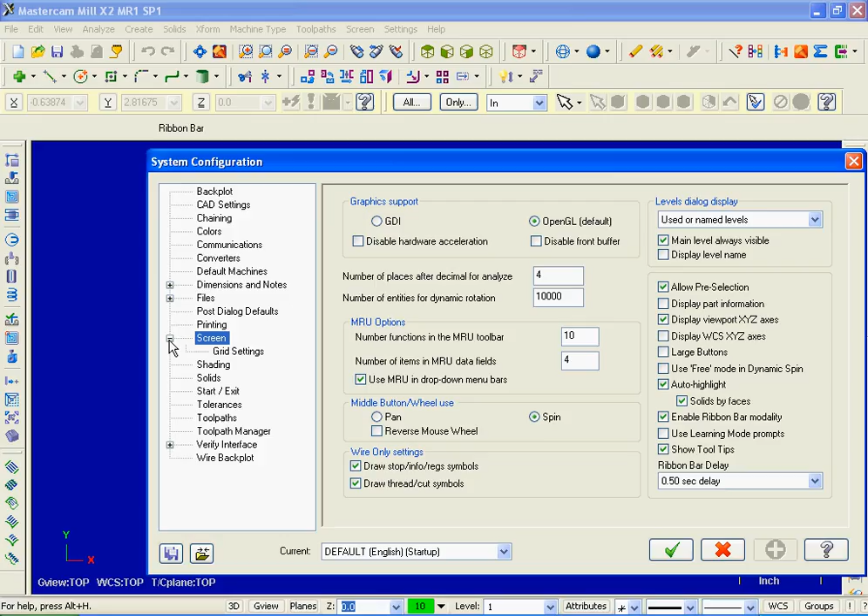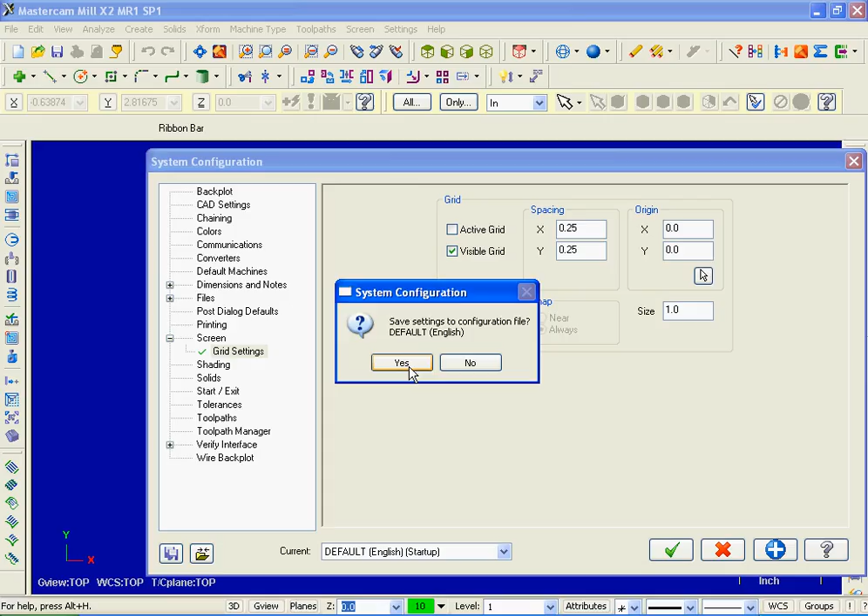Next we're going to set up the grid. So once again we're going to go back into Settings and I'm going to pick the first on the list, Configuration. On the left side of the screen I'm going to click the plus sign next to Screen and then click on Grid Settings. Moving over to the right, the first thing I'm going to do is put a check mark against Visible Grid and then slide down to the right. I'm going to input the size as 1.0. We're done here, so I'm going to pick OK, and then I'm prompted Save Settings. I'm going to click on Yes.

Now this particular lesson just deals with geometry. If I click Alt-O on the keyboard, now you can see the Toolpath Manager. I'm going to click Alt-O again. We don't necessarily need that open. Let's continue now and let's start to create the geometry.

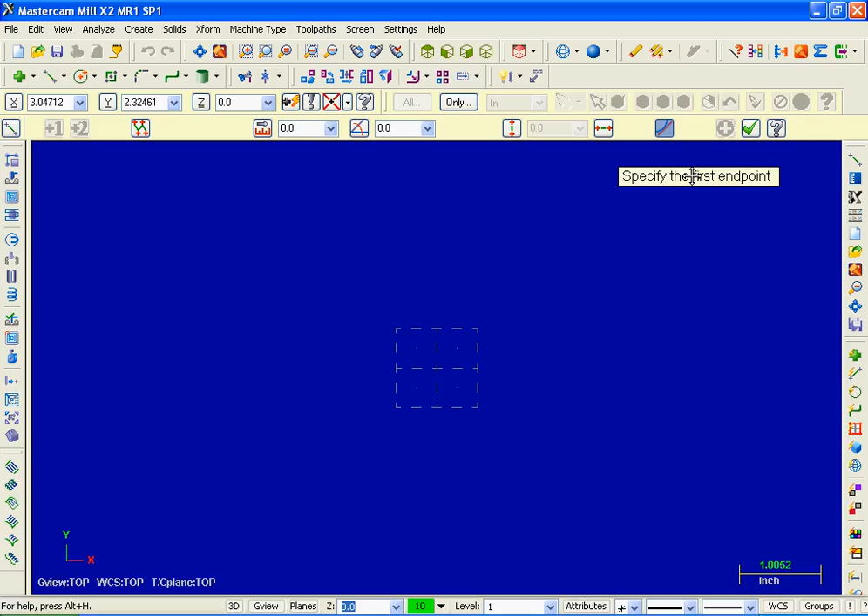So let's move up to the top of the screen. I'm going to click on Create Line and then Create Line Endpoint. Now there's the prompt, specify the first endpoint. If I click on it I can move it around. I'm just picking with my left button. If you want to change the size of the font, just right mouse click. You can change it to small. I'm going to right mouse click again and change it to large.

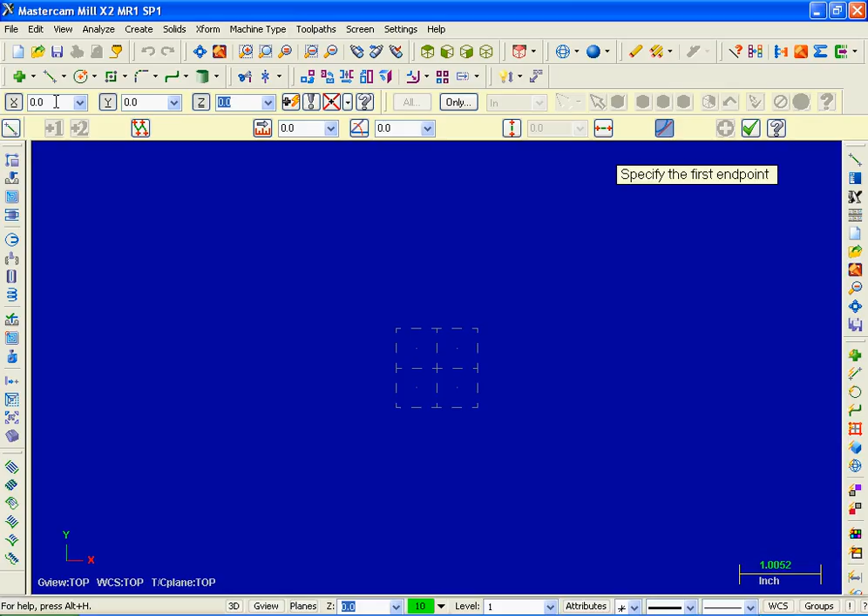So let's satisfy this first prompt, specify the first endpoint. What I'm going to do is, over on the left hand side of the screen, I'm going to click in the white space for the X value. I'm going to input 0 on my keyboard and then hit tab. We're transported over to the Y value. For the Y, I'm going to input 0 and hit tab one more time. Here we are in the Z value, nothing to change here, so I'm going to hit tab one more time.

Now the prompt on the screen has changed to specify the second endpoint. So again I'm going to click in the X value, input 0, and tab over. Now this time for the Y I'm going to input 5.0, hit tab one more time, nothing to change in the Z, so I'm going to hit tab one more time.

Now the line has gone flying off the screen, so let's move up and click on Screen Fit. Next I'm going to slide on over and click on Unzoom 0.8. What I'm doing now is hitting the right arrow key on my keyboard just to move this line over to the left so we can get the complete geometry on this screen.

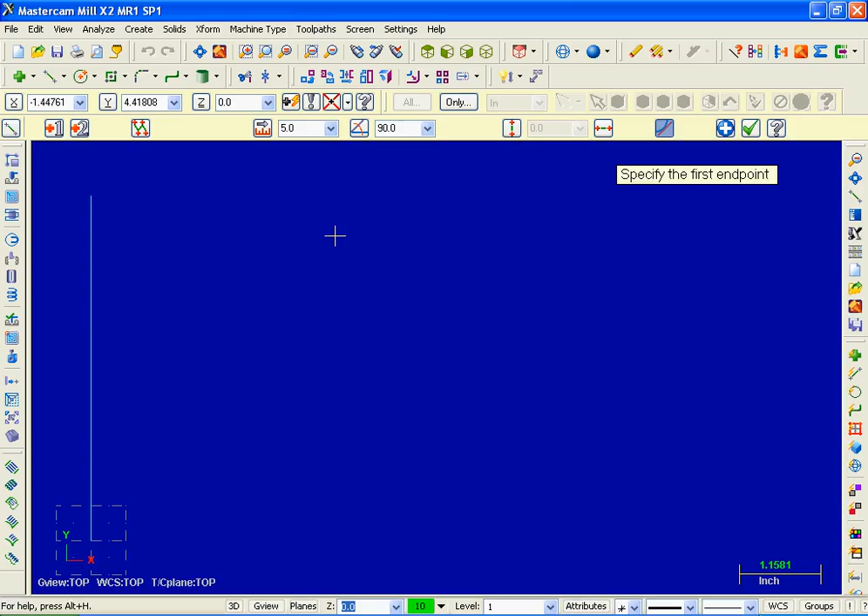Now a prompt, specify the first endpoint. What I'm going to do now is move the cursor over to the end point of the line, and as you can see there's a visual cue. This visual cue indicates that I'm going to snap to the end point of this line, so I'm going to pick this point.

The prompt changes, specify the second endpoint. I'm going to click up in the white space for X and input 1.5, hit the tab key, and here we are in the Y. For the Y, 5.0, hit the tab key one more time, nothing to change in the Z. I'm going to hit the tab key and there's line number 2. Let's move on to line 3.

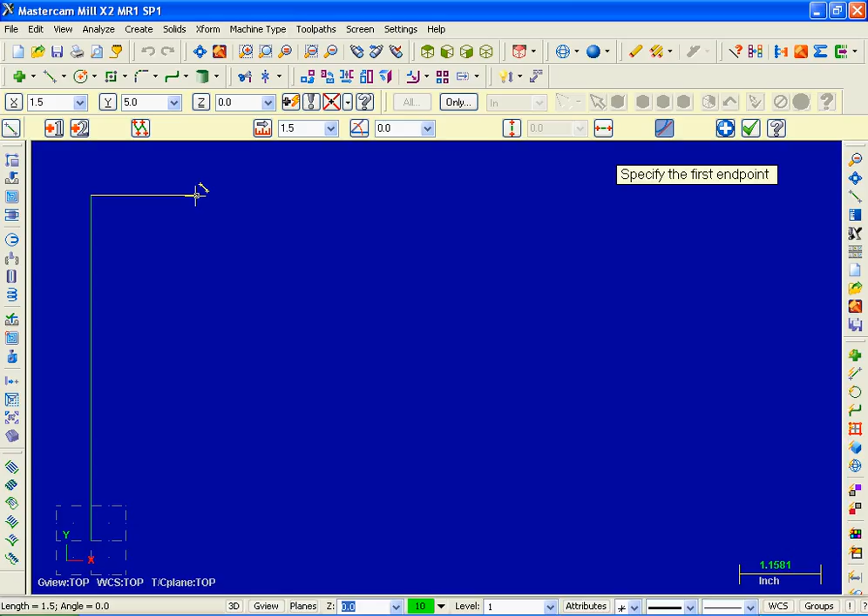Again specify the first endpoint. I'm going to move over to the endpoint and click on that point. Next I'm going to click in the white space for X and input 3.0, hit the tab key. Here we are in the Y. For the Y, 3.0, hit the tab. Here we are back in the Z. Nothing to change here. I'm going to hit the tab key and there's our third line.

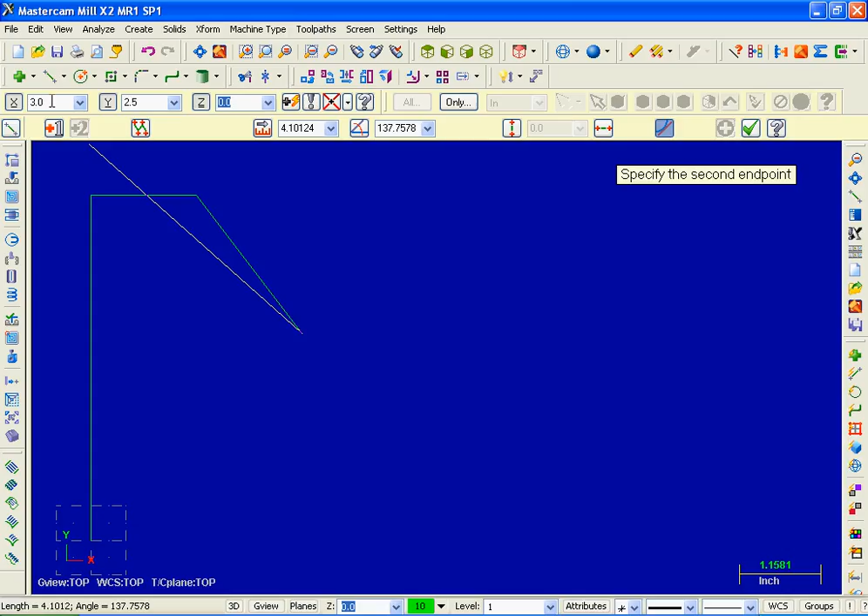As we did before, specify the first endpoint. I'm going to click on the endpoint of that line. Again, click in the white space for X. For the X value, 3.0, hit the Tab key. Now for the Y, 2.5, hit the Tab key. Nothing to change in the Z, so I'm going to hit the Tab key again.

On to line 5. I'm going to pick this endpoint. Got it. Click in the white space for X and the value 5.0. Hit the Tab key, and for the Y, 2.5, hit the Tab key. Here we are in the Z. Hit the Tab key one more time.

On to line 6. As we've done before, I'm going to move on to the end of this line and click on it. Click in the white space. Now I'm going to input 5.0, hit the Tab key. For the Y, 3.0, hit the Tab key. Here we are in the Z, nothing to change here. Going to hit the Tab key one more time. There's our line. On to line 7.

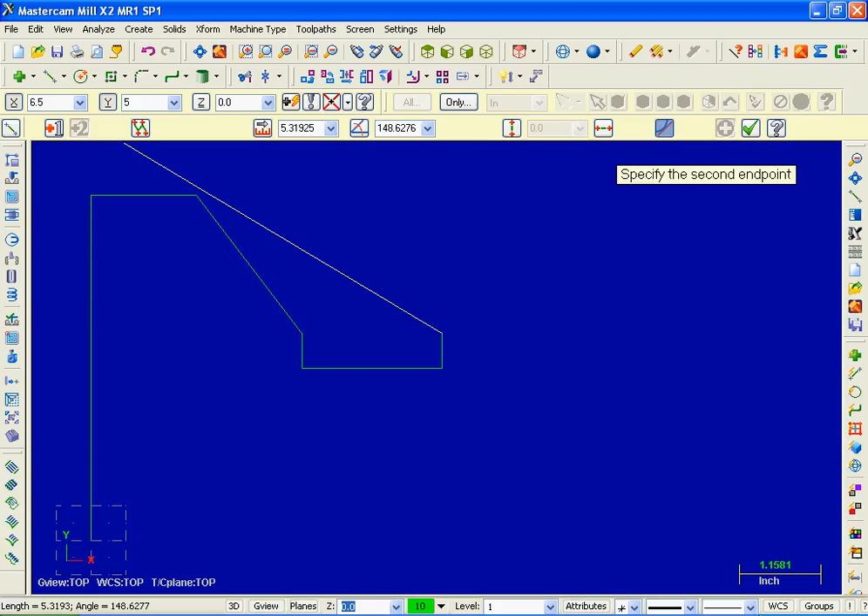Specify the first endpoint. Here we go. We're going to pick this point here. Got it. Let's click in the white space for X and input 6.5. Hit the Tab key. Here we are in the Y. 5.0 for the Y. Hit the Tab key. Nothing to change in the Z. I'm going to hit the Tab key, and there's our line.

Okay, on to line 8. Specify the first endpoint. I'm going to click on this point. Got it. Click in the white space for X, and we're going to input 8.0 for the X. Going to tab over for the Y. 5.0. I've tabbed over. Here we are in the Z. Nothing to change here. Going to hit the tab one more time, and there's our line.

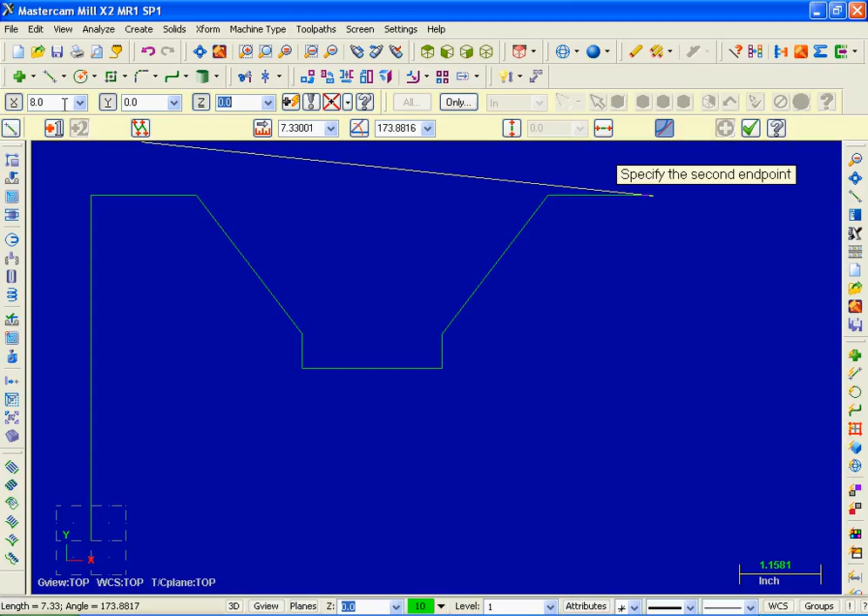On to line 9. Going to pick this point. Got it. Back up into the X value. Going to click in that white space. 8.0 is our X value. Tab over. Here we are in the Y. So for the Y value, this time it's 0. Going to tab one more time. Nothing to change in the Z. Going to hit the tab one more time, and there's our line.

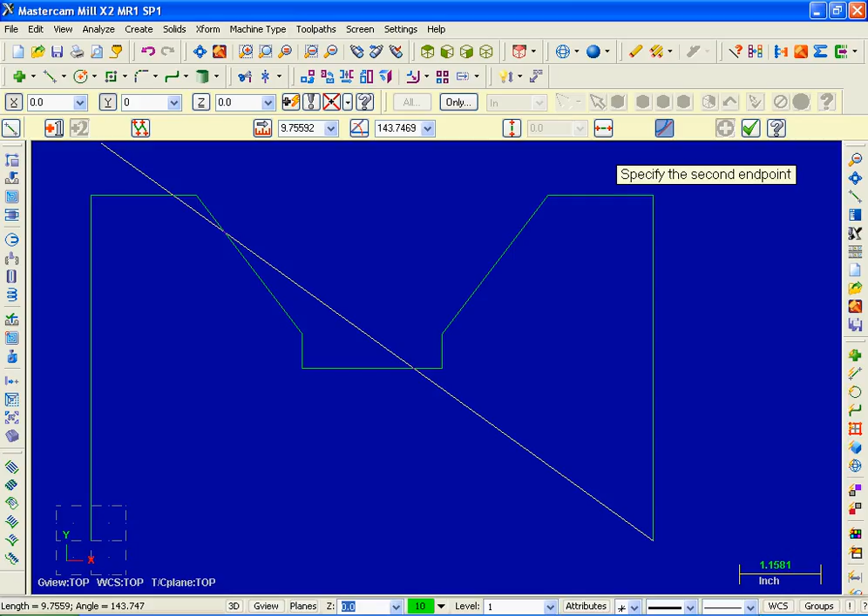Wonderful. Last line, line 10. So, going to click on this point, click in the X value. Our final resting place is 0 in X. Hit the Tab key. It's 0 in Y. Hit the Tab key one more time. Z is 0 here, and hit the Tab key. Everything looks great. I'm going to move up to the ribbon bar and click on the Apply button. Everything looks fantastic. Let's click on OK. We're done here.

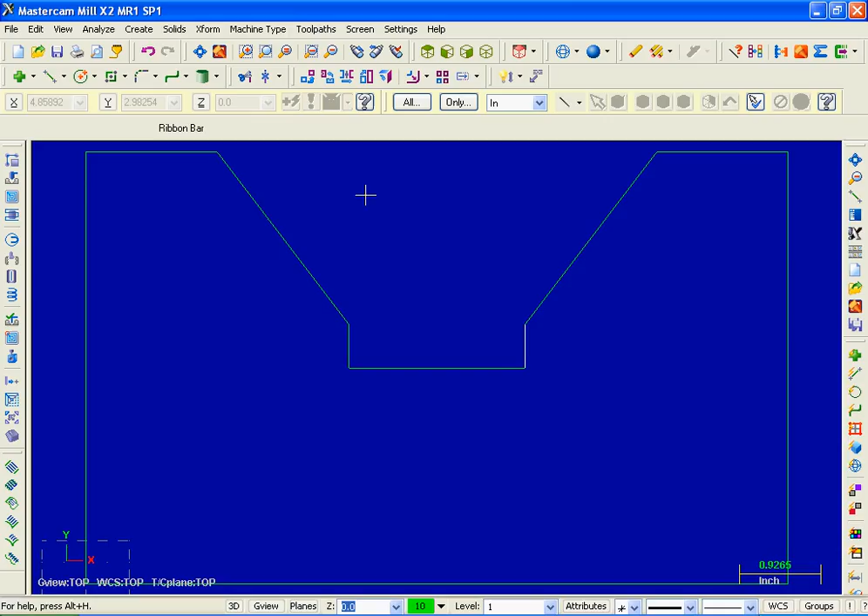I'm going to move up to the top and click on the Screen Fit icon, and there's our geometry, a thing of beauty. One last thing to do.

Let's save this file. File, Save As, and now I'm going to type in Mill Lesson 1 and click on the green check mark for OK. That completes this video. Thanks for watching.